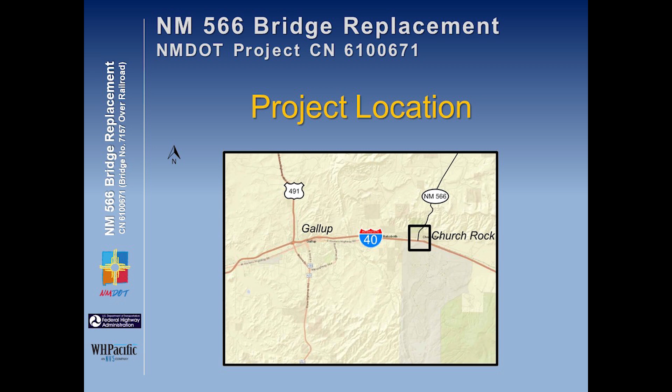The project is located on State Highway 566 in Church Rock, New Mexico, about 7 miles east of downtown Gallup. The project limits begin at the intersection of Highway 566 and Highway 118, extending northward along 566, ending at the intersection of Challenger Road. Overall, the project is about 0.7 miles in length.

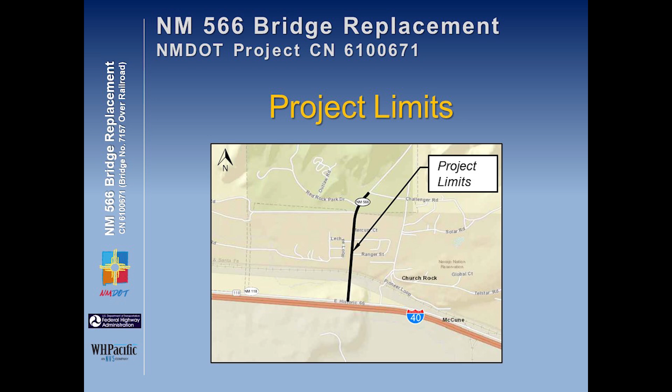The project has been under development since late 2018, and a considerable amount of work has been accomplished since then. So far, we've completed a detailed scoping report, a bridge type study, environmental investigations, preliminary design, and we're now in the final design stage.

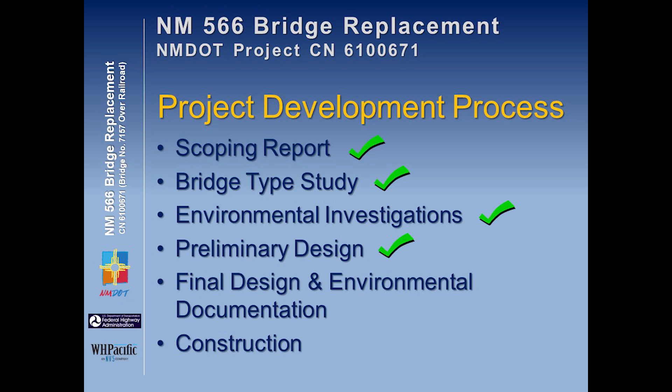Through these steps in the project development process, we've reviewed and assessed the existing conditions to determine deficient aspects of the highway. We've performed environmental investigations to identify environmental factors critical to the project. We've coordinated with stakeholders, including the Church Rock and Pinedale chapters, BNSF Railroad, McKinley County, and the City of Gallup. We've analyzed future conditions and needs, and looked at various improvement alternatives, selecting a preferred alternative for design.

Based on our study of existing and future conditions, we found that replacing the existing bridge is more cost-effective than continuing to maintain it, that traffic and safety improvements are needed to address deficiencies in existing conditions and accommodate future conditions, that pedestrian and multimodal facilities are needed to provide safe access for non-auto traffic, that most of the property adjacent to the project is Navajo lands and should be avoided, and that closing the existing bridge to traffic in order to replace it would create unnecessary hardship on the communities north of the bridge.

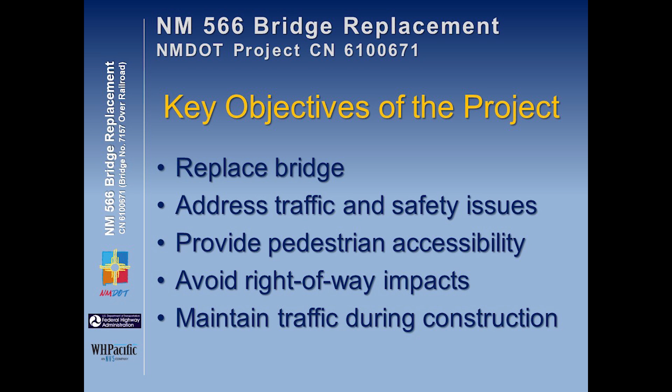Understanding these issues, the key objectives of the project are: replace the existing bridge, address safety and traffic issues, provide pedestrian accessibility, avoid right-of-way impacts, and maintain traffic during construction. With these key objectives in mind, we're developing the project design, which is currently about 60% complete.

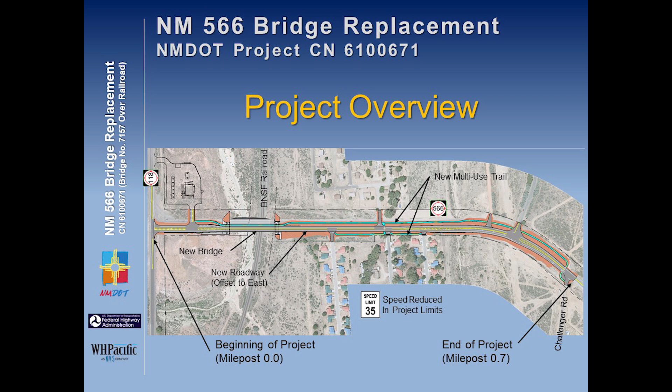Two, a new longer bridge. The new bridge will reduce maintenance needs and costs and allow for expansion of the BNSF railroad underneath. Three, a new 10-foot wide paved multi-use trail for pedestrians and bikes, which improves safety for all road users and encourages multimodal travel. And four, a reduced speed limit. The speed limit will be reduced from 45 to 35 miles per hour within the project limits, which will also improve safety and addresses concerns identified by the community.

Now, looking closer at the details, from Highway 118 up to the bridge, there will be a new southbound left turn lane for traffic turning east on Highway 118. There will also be a new driveway entrance to the planned Church Rock convenience store and a southbound right turn lane for traffic turning into the store. The new multi-use trail will begin on the west side at the convenience store driveway and will be separated from the roadway. The new bridge will be 376 feet long, configured in 3 spans of steel girders.

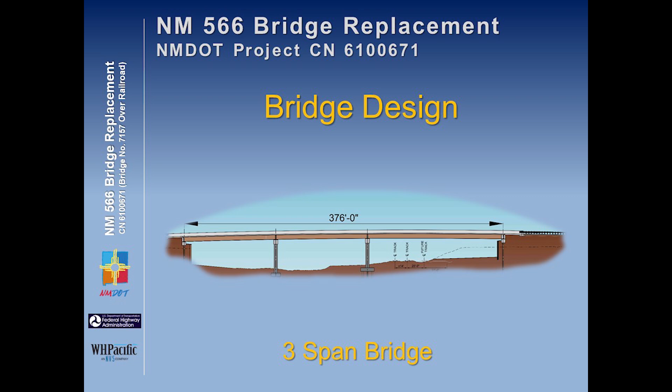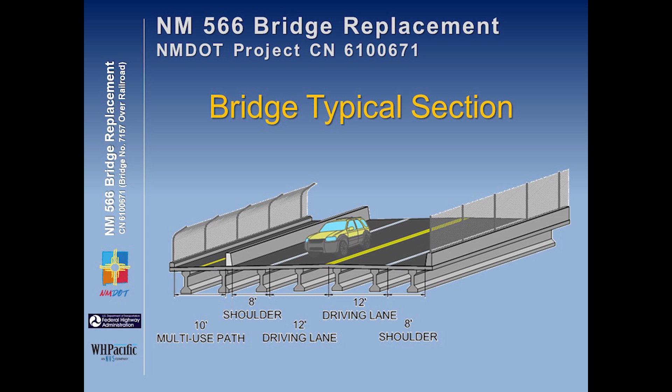The north span will be longer to allow for addition of a third railroad track and a maintenance road underneath. The bridge will have a concrete deck and fencing along the sides, which is required by the railroad. The new bridge will also include a 10-foot wide multi-use trail along the west side, separated from traffic by a concrete barrier.

Moving north of the bridge, the 10-foot wide multi-use trail will continue along the west side of the highway, offset from the highway by approximately 20 feet. There will also be a 10-foot wide multi-use trail on the east side of the highway, beginning at Ranger Street and continuing up to Mercury Loop. The marked crosswalk crossing Highway 566 will be located at the intersection of Indian Village Drive.

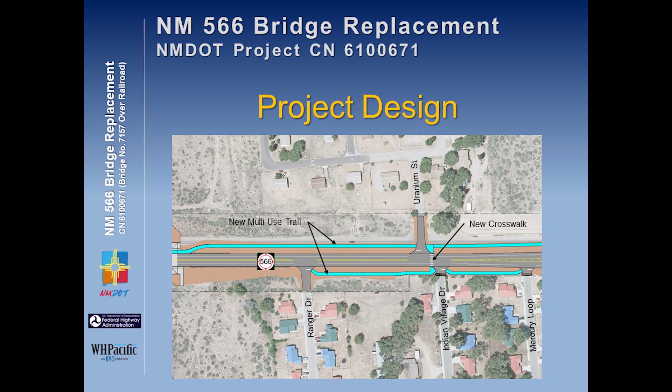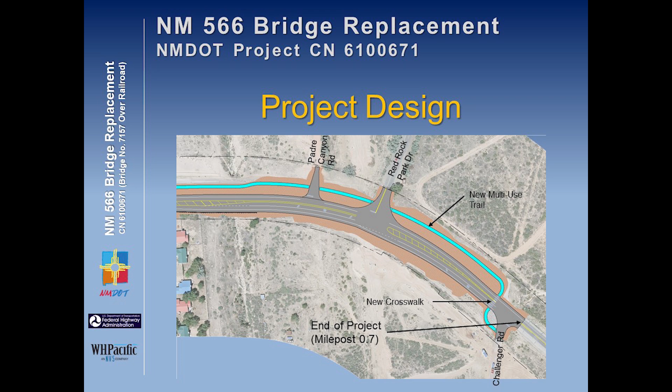Moving further north to the end of the project, the 10-foot wide multi-use trail will continue along the west side of the highway to Challenger Road. A second marked crosswalk crossing Highway 566 will be located at the south side of the Challenger Road intersection. A northbound left turn lane will be provided for traffic turning into Red Rock Park, and a northbound right turn lane will be provided for traffic turning onto Challenger Road. The new roadway construction will end at the north side of the Challenger Road intersection.

So that's the basic design for the project as it stands today. We've also prepared a brief video simulation of the design. The video shows a flyover of the project and views from various locations and angles, and is meant to give the viewer a feel for how the project will appear when completed.

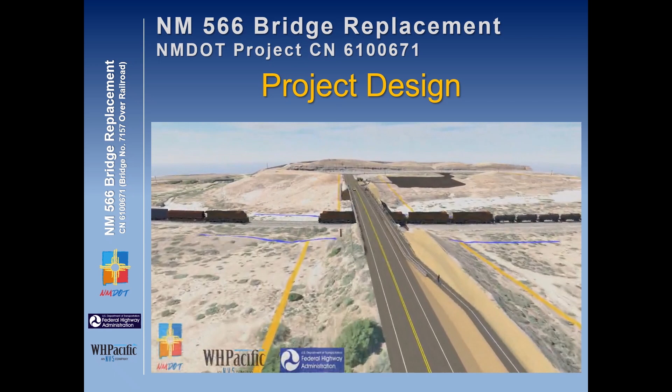The video is conceptual in nature and doesn't have all of the details of the finished project, but can help you get a clearer picture of how it will fit into the surrounding landscape. The video will be included in the project materials posted to NMDOT's website. I would encourage you to check it out if you're interested in a visual rendering of the project.

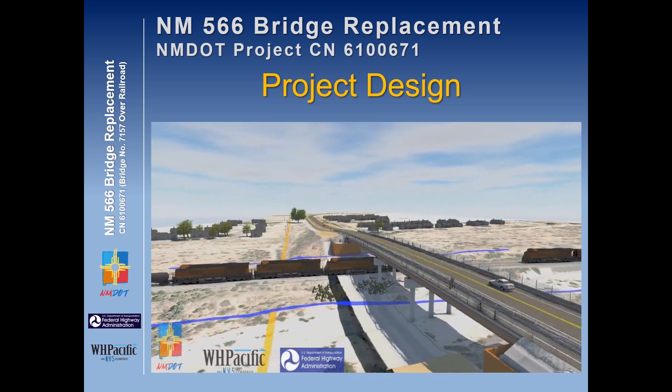Now, regarding the schedule going forward, as I mentioned, we're currently about 60% complete with the design. We're scheduled to complete the design and environmental documentation late next year in 2021. We anticipate construction will begin in the middle part of 2022 and could take about 12 to 15 months to complete. However, it's really important to know that construction over the railroad is subject to the constraints of rail traffic, which could affect the overall time of completion of the construction.